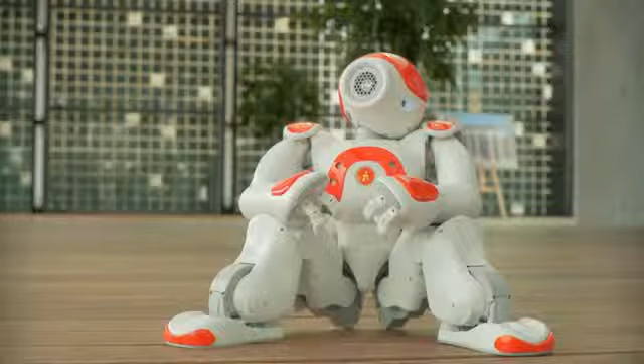I want to come with you.

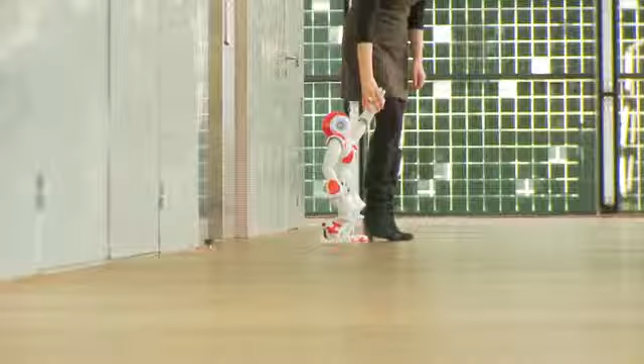Our goal with robots is to have robots helping people, and not only the geek. I want to have robots helping everyone. But in order to do that, we need to have the robot accepted by people.

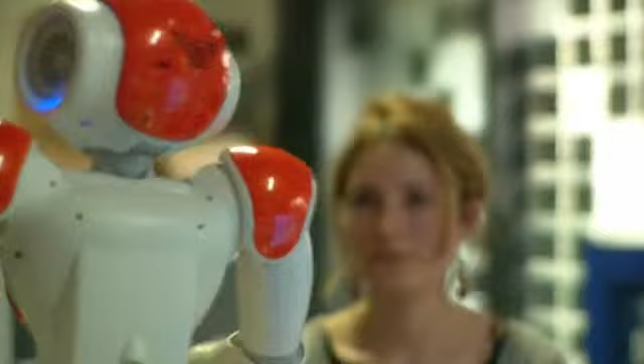I'm Bruno Maisonnier, head of Aldebaran Robotics, founder and CEO of the company. Give me something, please.

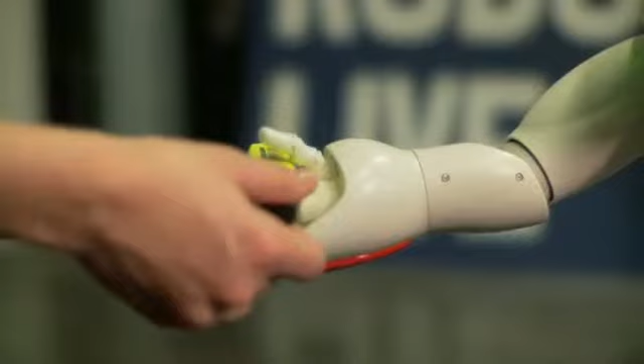We think that the robotic market is going to be huge in the future. And this comes from the simple fact that the world population is aging very fast. And we need robots to do whatever they need at home. What do you want me to do?

When people are depending on someone else and need to have someone else helping them, they are in a secondary position. But when they have a robot doing that, they are in the first position. They are leading.

Notre Dame University in the United States, they are really working with robots helping autistic kids. So we discovered that robots are objects they can interact with, they are comfortable with interacting with robots, they like it.

The first impression that you get when you see the robots is the outside shapes. If the shape, if the form is too aggressive, you won't interact with that robot.

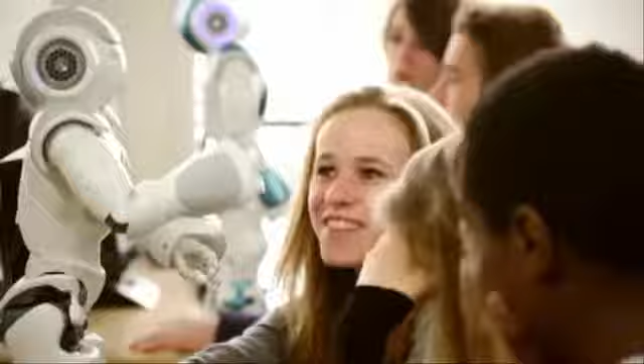There are many people ready to develop softwares, but we are just lacking robots. We are just missing robots. So that's why Aldebaran began with a platform for providing all those who want to explore this new world, who want to be part of this revolution, to be able to do it.

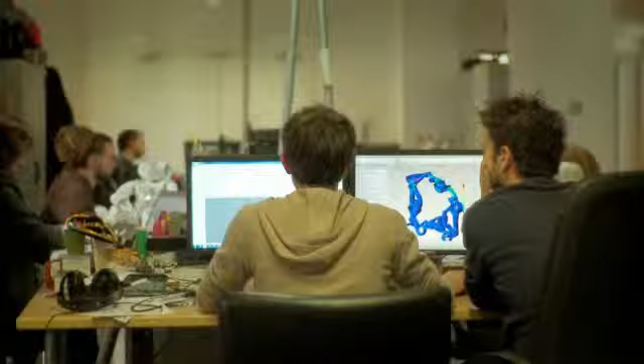I've been working for Aldebaran Robotics for 5 years as a mechanical engineer. I especially work on designing gears and integrating motors into the platforms we develop at Aldebaran.

Well, like Ludovic, I am also a mechanical engineer. I mainly work on the shells, but also on internal parts and the structure.

For each project, the process is similar. We start with sketches, essentially 2D images, that we then translate into digital data and 3D volumes using SOLIDWORKS surfacing tools. This gives us the ability to rotate the pieces and robots in the space and to improve the design when it's not as pure as we want it to be.

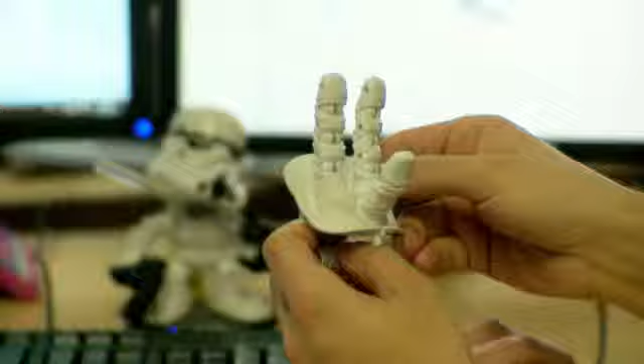So we start with the exterior design of the hand as we have here. It is smaller than a human hand, it's the size of a small child's hand. And inside there are over 100 parts just for one hand. In addition to all mechanical constraints, we have 2 degrees of freedom that we have implemented in this hand, and SOLIDWORKS allows us to look at all the possibilities and optimize the mechanical design inside the hand.

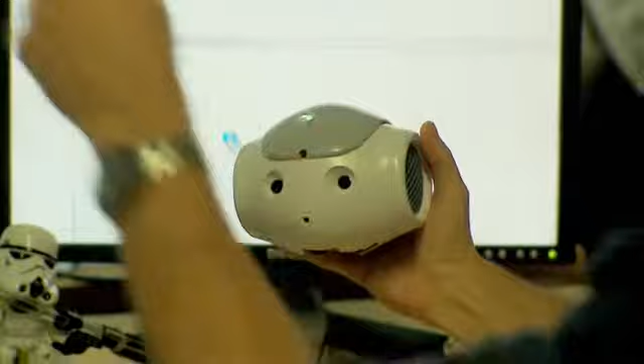Even more complex is the robot's head, which combines mechanical, electronic, and optical components, like cameras, for example. One might say that all NAO's intelligence is gathered in its head. There are also LEDs, microphones, and speakers.

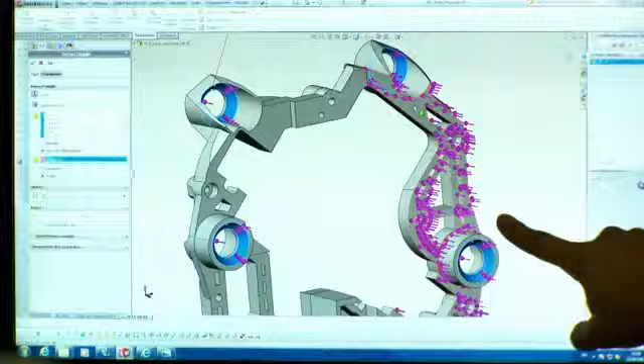We use SOLIDWORKS simulation, which allows us to generate digital models and know if the part will resist to shocks or not, based on stresses we apply to it. And once we have proceeded with validation in SOLIDWORKS, we can move on to production.

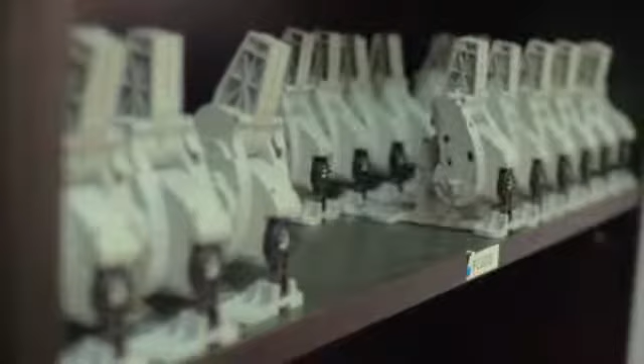We use SOLIDWORKS in order to project the product into the future, and we can really optimize, really improve the parts before it exists, before it is manufactured. You have to know that into that robot there are more than 1,200 plastic parts.

On my team, there are 45 people working on the design, and I need to orchestrate the daily work and make sure that when we create new parts, the version is correct. So for that we use EPDM, and it helps us to focus on innovation while EPDM is taking care of the structure of the project.

I hate the techno stress. I don't want to have devices that are asking me to invest intellectually to understand how they're working. So I don't want my robots to create techno stress to people.

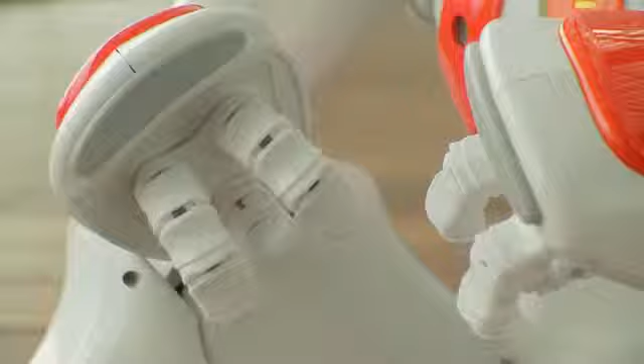When you want to change the world, to improve things, you have to go beyond what you are able to do. You have to decide to go for something you don't know how to do. It's a new territory to conquest. Shall we try something new today?